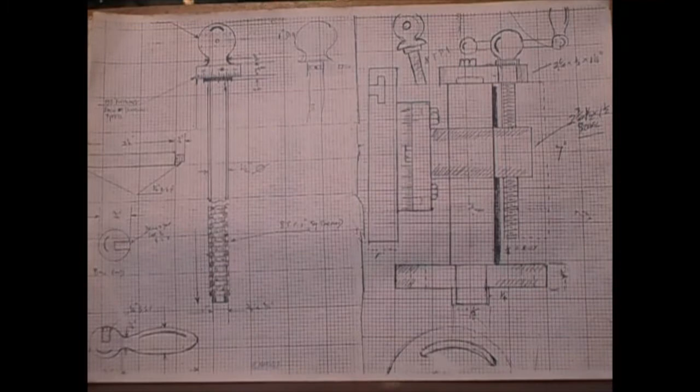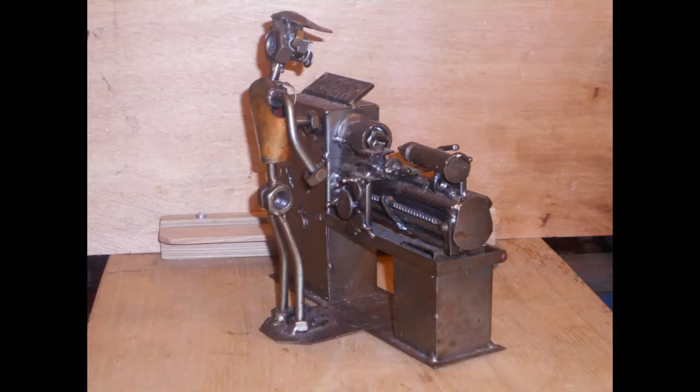Right now I want to make a tape showing where I draw up my plans for my accessories, and I'll show a lot that I have done over the years. I'll show you a few of them, but I draw them up in my little store now.

Now here is my drawing board, and here is a little device I put together for holding it together and working on it. Drawing up...

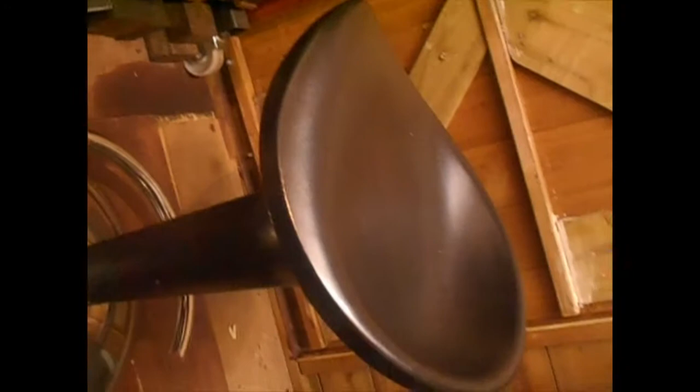Now here is a very useful tool. Someone gave this to the missus. She didn't want it at the time, so she handed it over to me. It saves me from carrying in my tractor seat. Handy little seat to sit on. This is it, it's just handy to work at. Keeps it nice and steady.

A ruler I can move up and down, and I'll show a lot of the plans that I've done in the past. Here is one that I made the tape on.

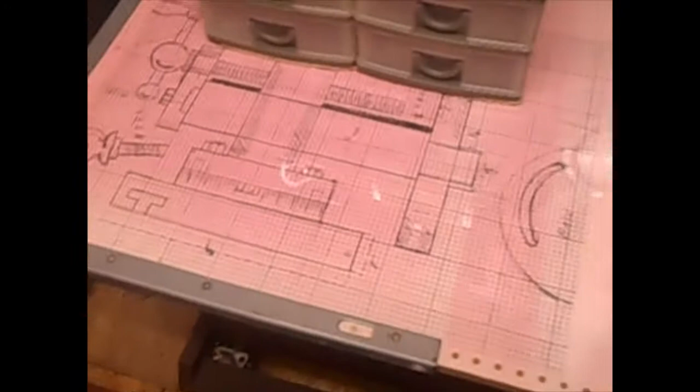Now here is a tool I fell in with at an antique shop a while back, and I think it was really worth the money I paid for it. I'll tell you the price after I've shown it, a few bits and pieces on it.

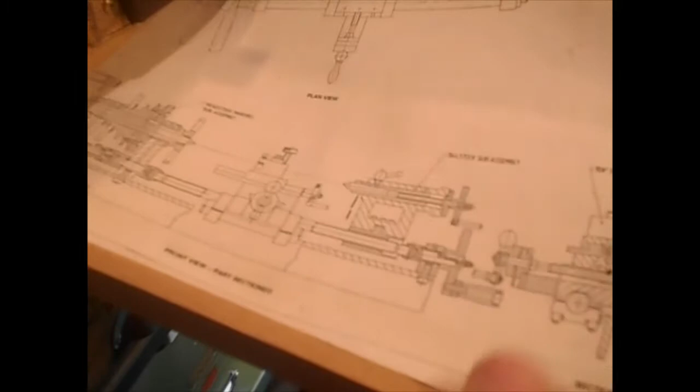Now, these are plans I have of different jobs. Now, I didn't do these plans, these are just plans of different machine tools that I've gathered up. I have quite a lot more, but these are ones I have.

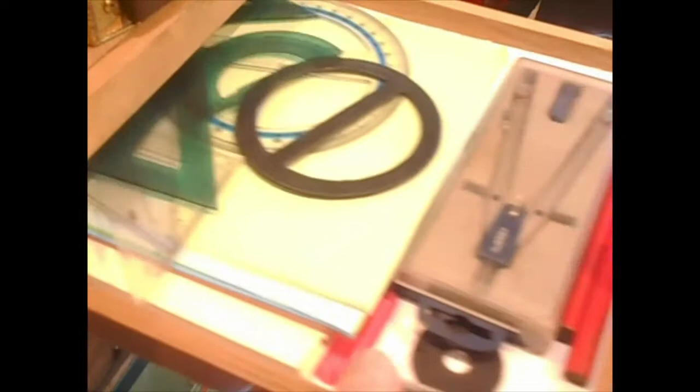Now, this drawer is where I keep all my utensils for doing my work with paper, all the essentials, a couple of these, that's in those drawers. Fasteners. This, I put a sheet of paper here if I was drawing anything on the lid. Sits in nicely.

Now this, it is a nice clean box. Fasteners, carrying handle.

Now let's have a look at what I have in the top compartment. We'll look at these in detail.

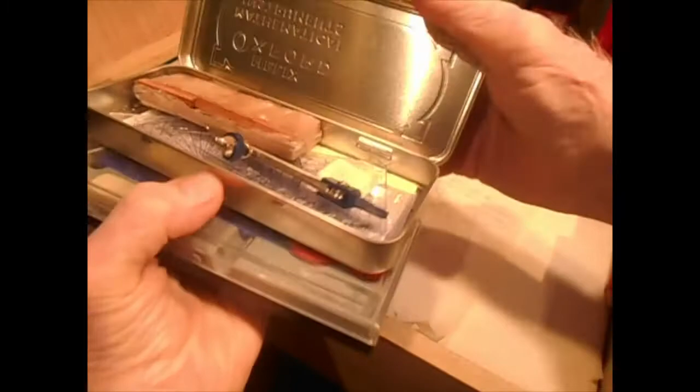Now, another one of these is a pencil case, coloured pencils, markers.

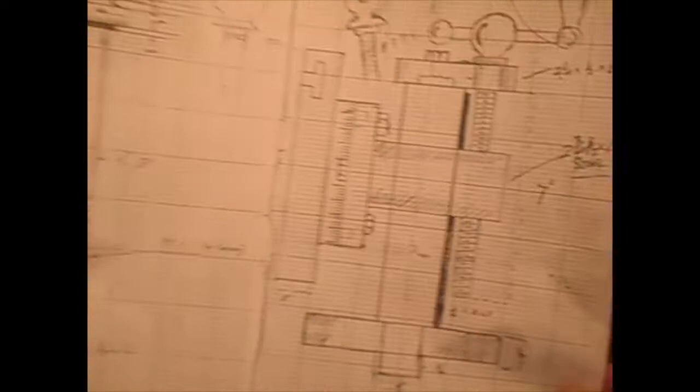Right, these are some of the plans that I have done over the years, things that I have made. This, American, some call it an American tool post, some call it a lantern tool post. This one, I have made these. This is the tailstock I had to make before I got the one for the Harrison.

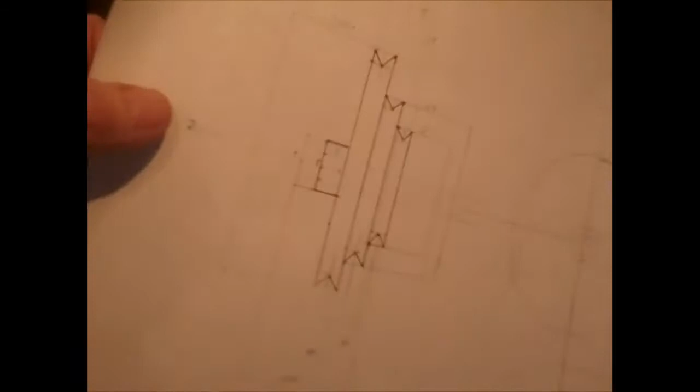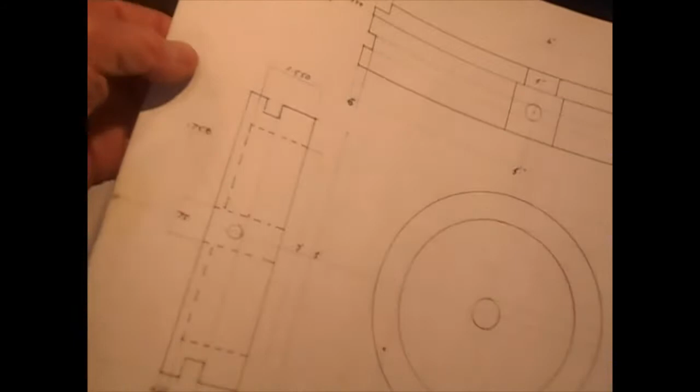These are all, this is a 3-step pulley I made. These are different tools. I show the tools. Rotary table.

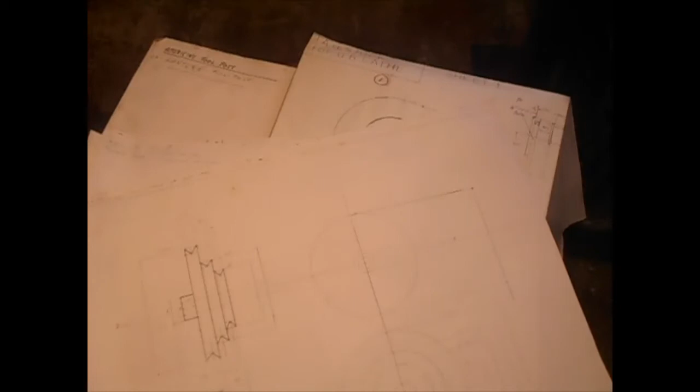Rotary table part 2. They're just different ones I've drawn up that I've made.

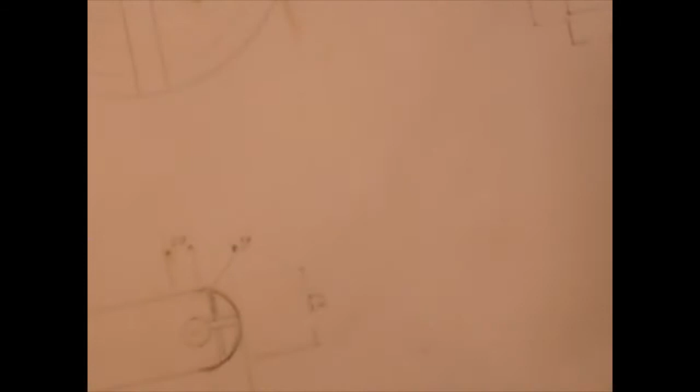Now this is where I keep some of my plans with tracing paper, and this is it.

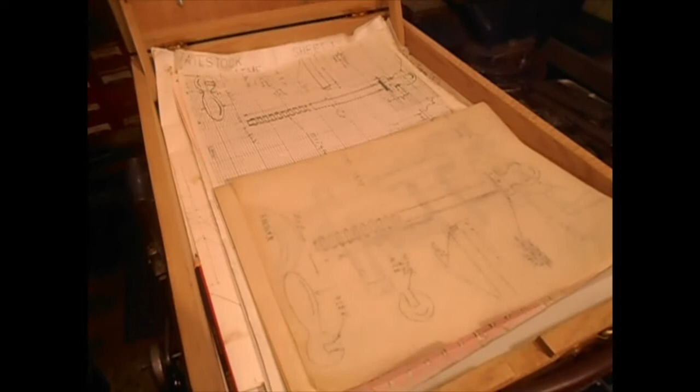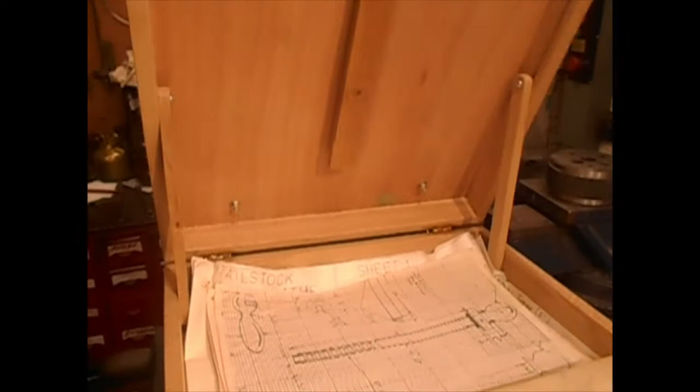Now this box, as I said, I bought it in an antique shop. This can be screwed out, used as a ruler on the top if need be. Fasteners. I got them down to my best price, £14, which I think was very, very reasonable.

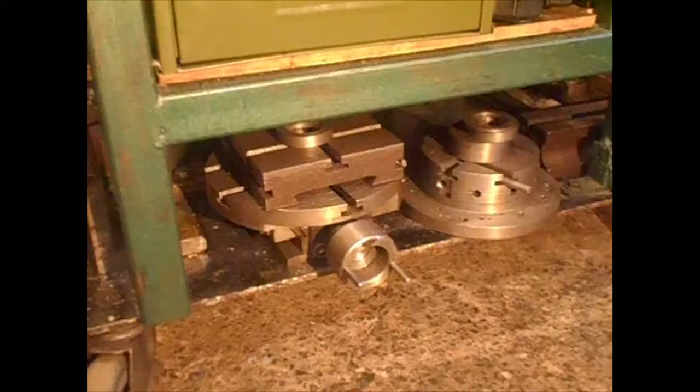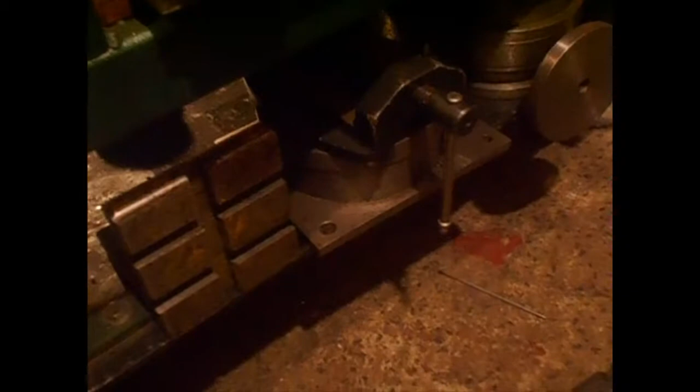Now here are the accessories that I have shown the plans of. I have tapes on all of them, making them. This different, I have shown the plans of these, making them, tapes on them.

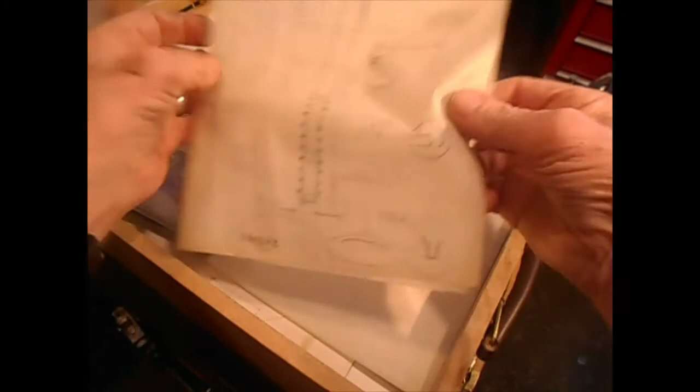Now this, my tracing paper, this is the job that I done. That's it there.

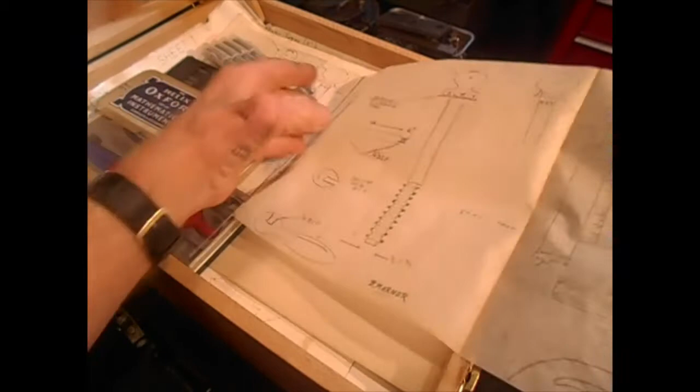Now, this is very fine leads, heavier lead, medium leads for here. Coloured pencils, six colours on it.

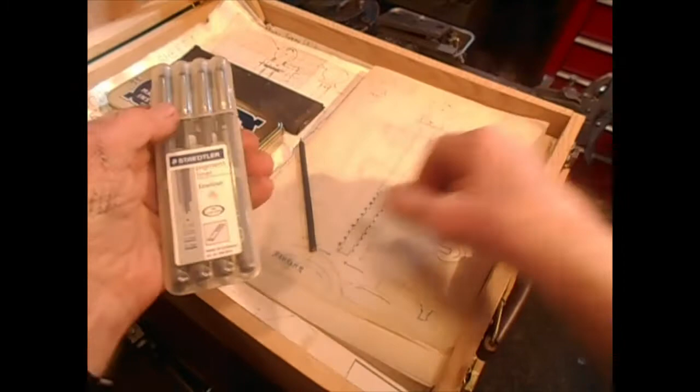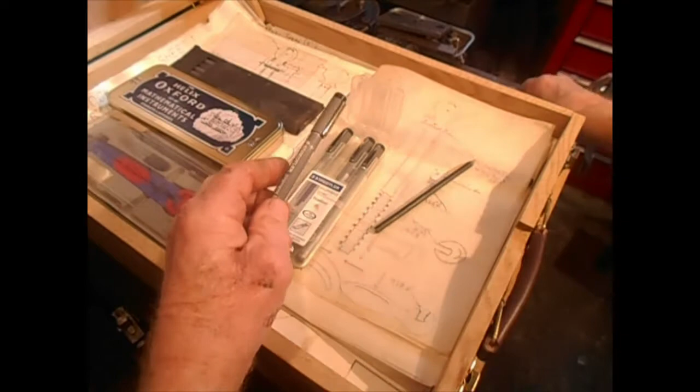Now these are very fine markers. There's 0 1, 0 3, 0 5, 0 7. They are made in Germany. I'll show this one, and that's 0 3. There seems to be quite a lot of ink in them, for they hold it pretty well.

And that's my tracing paper, and that's the job I did.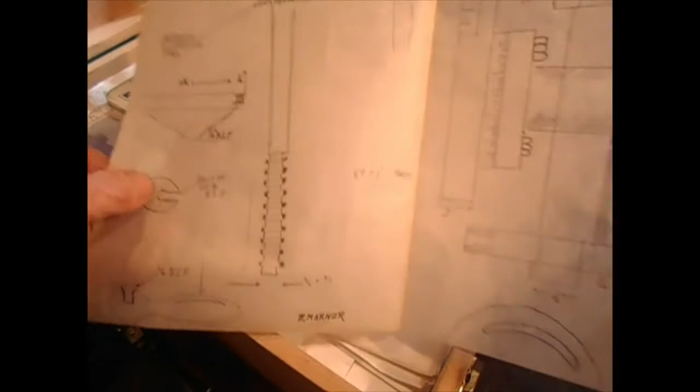Now this box, I'm pleased with this box. As I said, the price I was looking was a good bit more than I paid, but I got them down to £14, which I'm very pleased with.

Now that is where I draw up some of the plans that I do for the jobs that I'm doing, and I have this box now to keep some of them in. I hope some of you like this idea, but there's something else now I want to talk about.

Now I would like to talk about old catalogues. I like browsing through, maybe sitting at night or on a Sunday afternoon, especially these winter nights, browsing through old catalogues, checking the prices or comparing them. But in saying that, I have 2 or 3 up-to-date catalogues, last year's and this year's, but I like browsing through old catalogues, and here are some of the ones that I have.

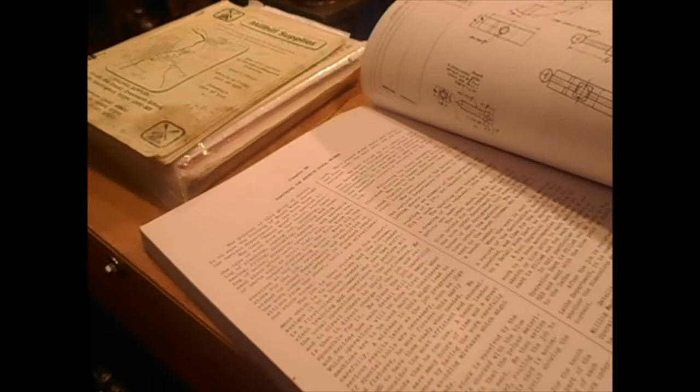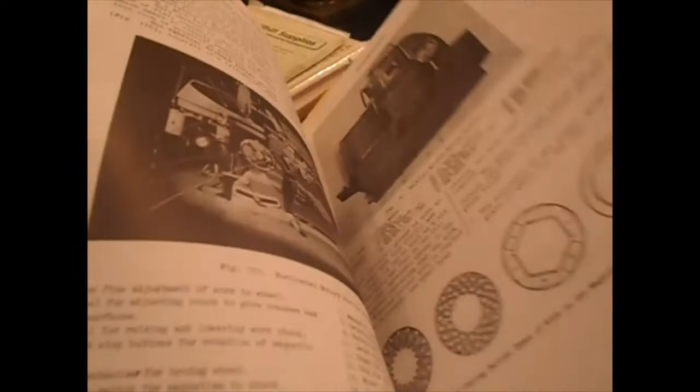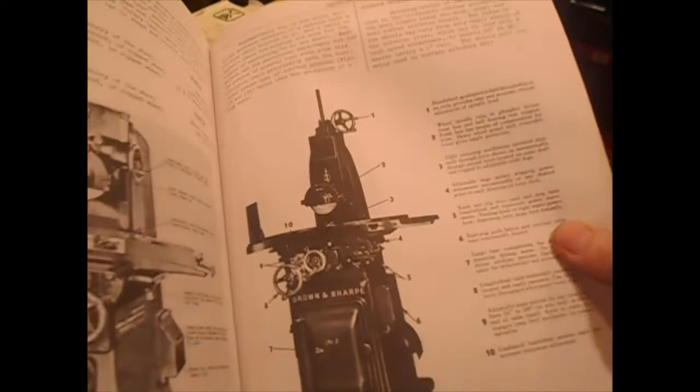1942. The catalogue then goes into a lot of detail on your tooling, machine tools.

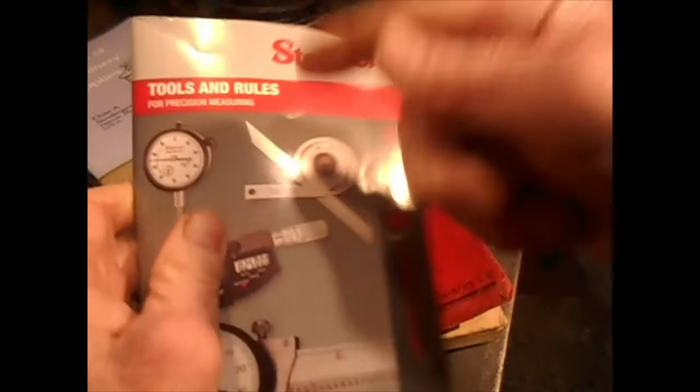Now here is two catalogues, 1927, 1914. They're Starrett, now this is a reprint up to 1914. Now this one, 1927, it's still original. I got these out of the internet. I must have had them, what, maybe 10 years.

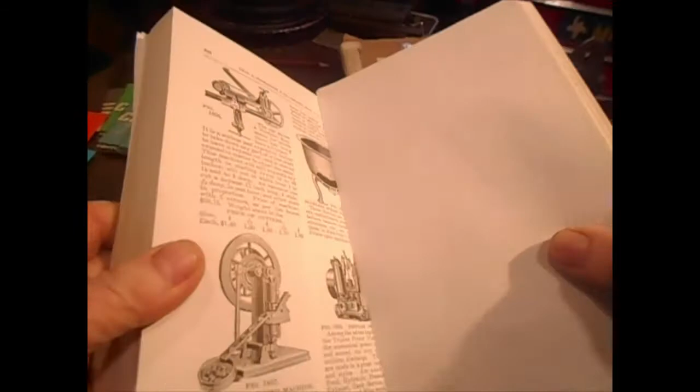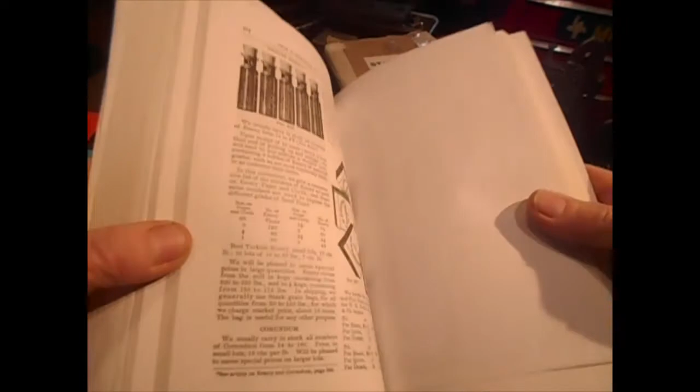My daughter got me this one about 10 years ago. The stories on the tools and that, very nice. Today it's all internet, or mostly, but I like lifting old tools when I'm on my own, going through them.

Now that is a few of the plans that I have drawn up over the years and jobs that I have done, and a few of my old catalogues I like to browse through when I get a free moment on my own. I hope some of you have found this of interest.